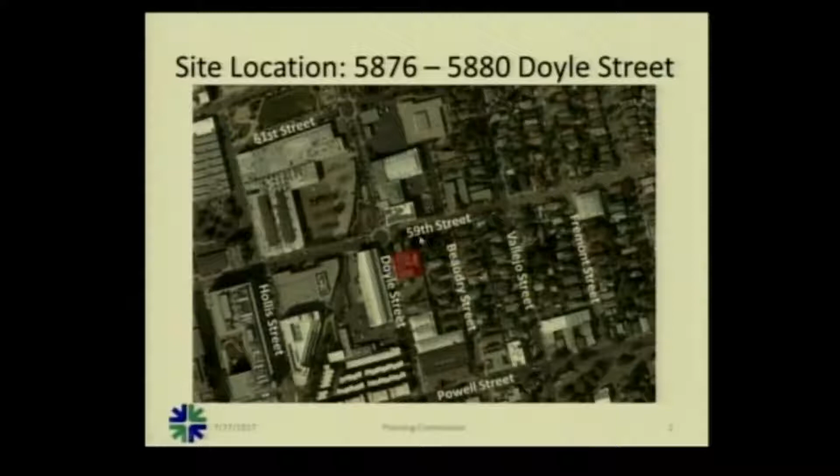Good evening, commissioners. So I'll be presenting tonight on Doyle Street MEWS over on Doyle Street. Here's the location we're talking about. 59th Street is to the north, Powell Street's to the south.

Project overview: this is to demolish 4 existing legal units and 2 illegal units. Because it includes the demolition of residential units, this requires city council approval. The proposal is to replace it with 6 new units, all of which have 3 bedrooms.

For background, this originally came to Planning Commission for a study session back in April of 2016. At that time, there were questions about the feasibility of obtaining 50 bonus points, which are needed for this project, through the use of zero net energy on the site. There were also concerns raised about existing trees to the north and east sides of the property, and in general, unit and project design feedback was provided.

It came back again to the Planning Commission in August of 2016, and at this point the applicant revised their proposal in response to concerns about net zero not being feasible. So the proposal at that time was for 50 bonus points for family-friendly unit design, as well as 50 bonus points supporting citywide small business funds. The Planning Commission supported that proposal, and there were concerns still about potential impacts to the redwood tree, which is on the north side across the property line, and also additional unit and project design feedback.

This also went to City Council for a study session in November 2016. They were generally supportive of the project. The issues they raised as concerns were design and materials at that time, preservation of the redwood tree again, and the council deferred back to Planning Commission for advice and direction on those issues.

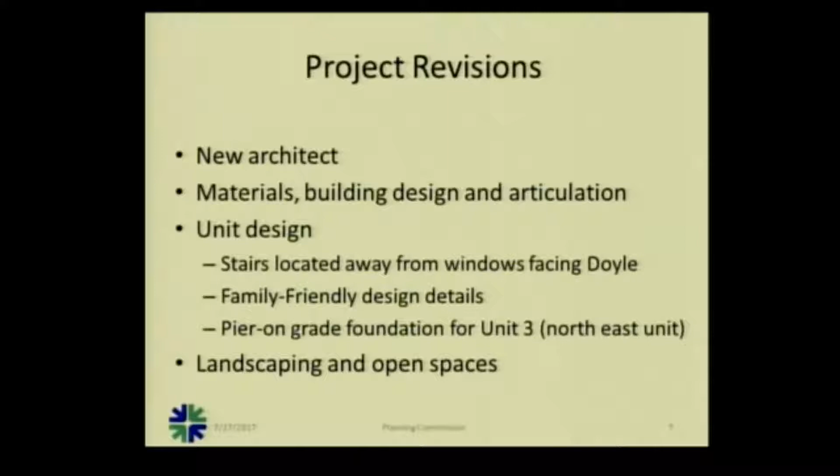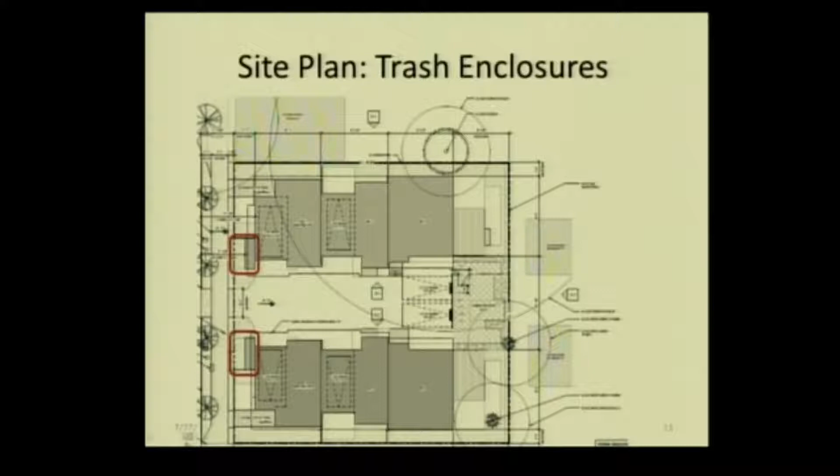Something that came up before was the design of trash enclosures, and those are located at the very front of the property. The applicant has been working with Marcy Greenhunt and Public Works to make sure that they're adequately sized and located so that they can be picked up properly from waste management. Here's the plan that they submitted. Marcy's reviewed this plan and feels that it meets all regulations and requirements for that.

So what we have here, it's a little bit hard to see on the screen. This is the anticipated location that the garbage truck would pull up, and this is the path of travel to get to the 3 types of waste streams on either side, which are enclosures in front of the buildings.

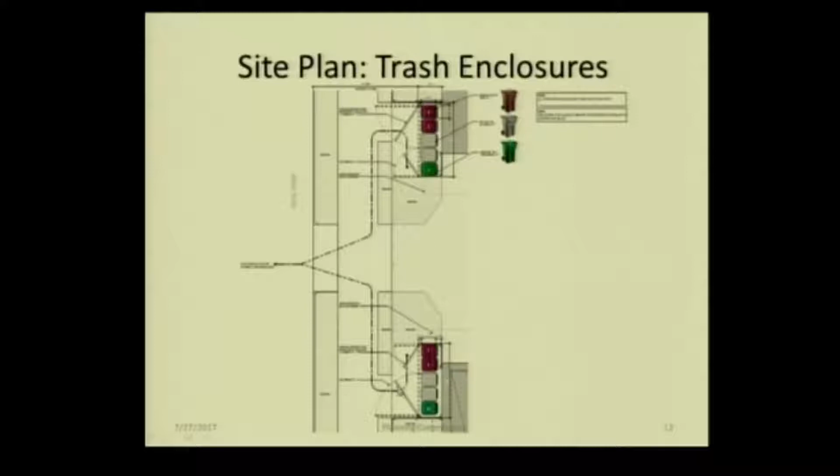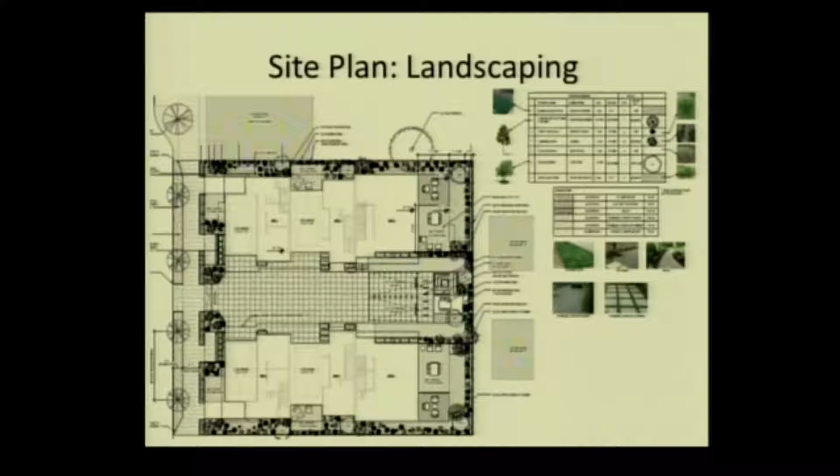So site plan for landscaping is here. There's a lot more details than before. We do have a water efficient landscaping ordinance here, so this plan appears to comply with that. Some more details will be provided in the future to make sure that all the measurements for that pencil out.

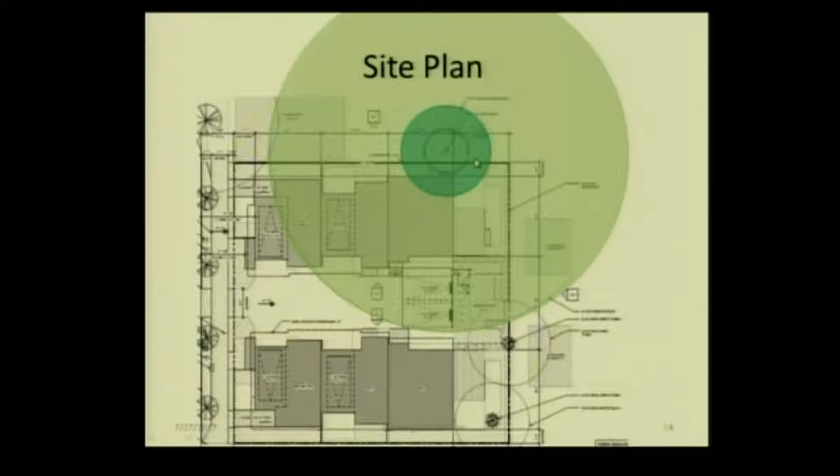And here is the tree on the north side of the property. This thicker line here is the property line, and then there's this jagged line representing the redwood tree. The dark green is the redwood tree's primary root plate, so if you cut into the roots in that area, it can compromise the structural stability of the tree itself. The larger, lighter green circle represents where there could actually be tree roots to that full extent of that area.

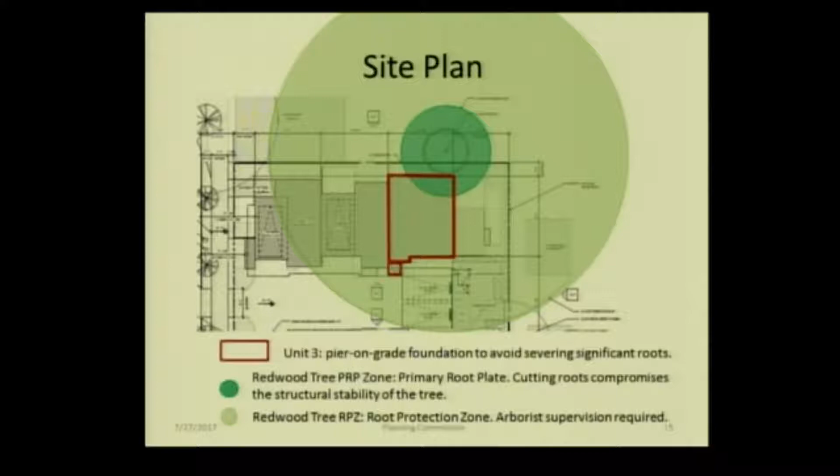Most of that area is paved over right now, so it's not known for sure exactly where the roots are, but there was an arborist report included in your materials that discussed this, and the arborist came to the last Planning Commission study session as well to discuss the details. As you can see, the northeastern unit's outline overlaps with that redwood tree zone, so that now has a pier-on-grade foundation, raised up and not level with the ground, giving more flexibility in where you can actually put the supports to avoid the tree roots.

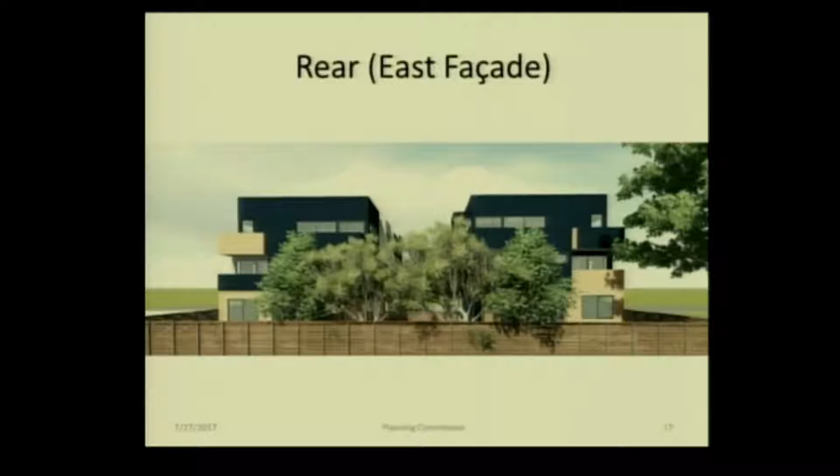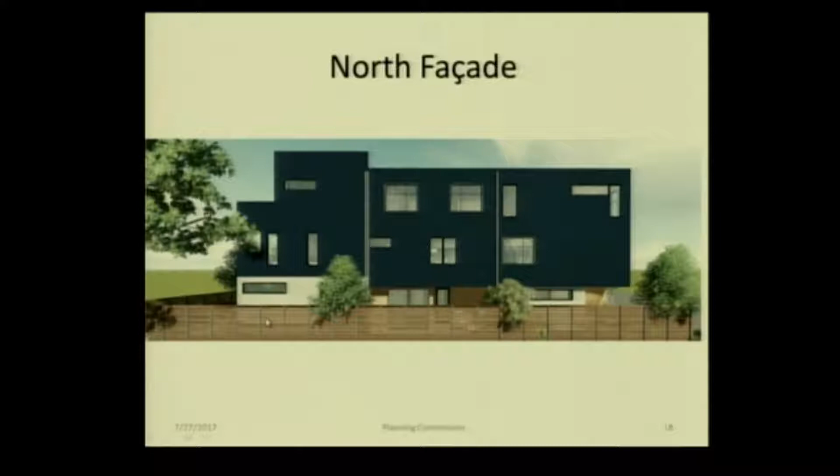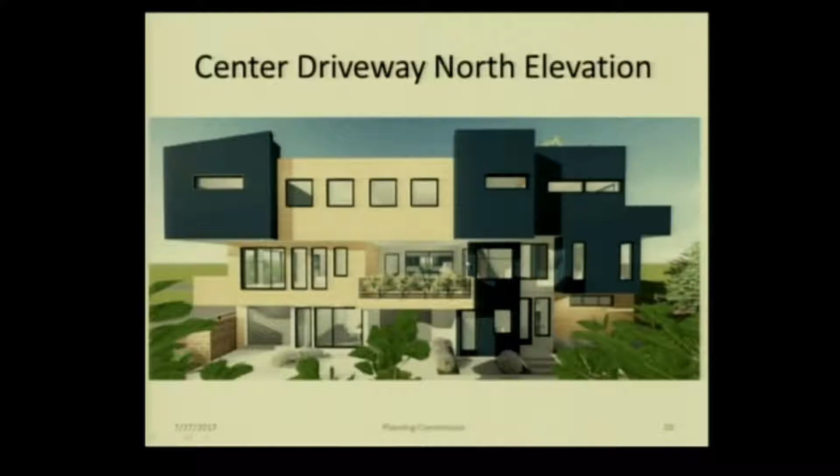And then here, there's a driveway in the middle, if you haven't noticed that already. This would be the north building. If you're in the south building looking across, this is what you would see. And then flip from that, if you're facing south, if you were in the north building looking across the driveway.

And here we are facing north again. So where my cursor is, that's where the trash enclosures are, and the entryways here to the unit, the front unit.

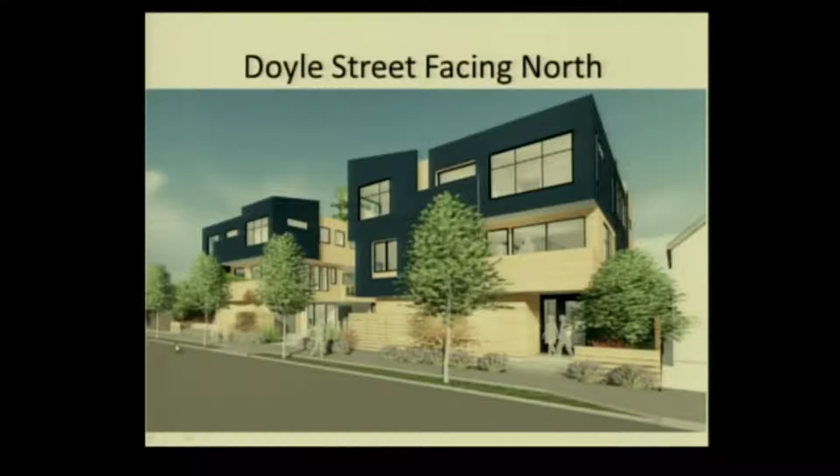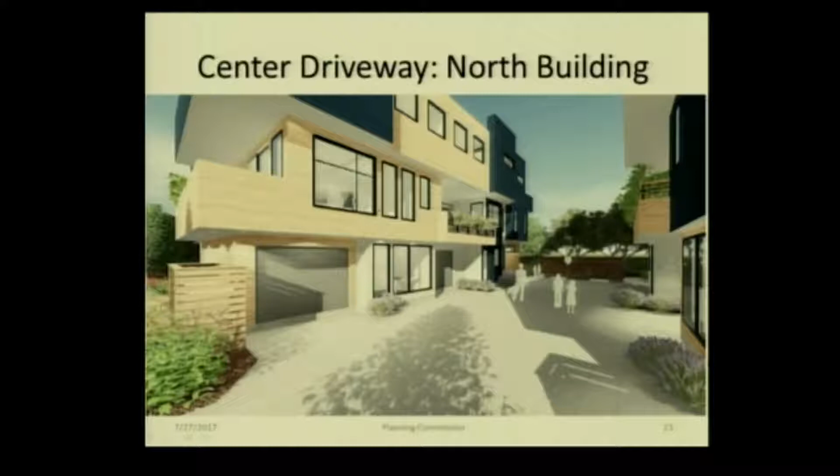If you were to walk into the property now, going into that center driveway, you're looking back at the rear of the property here. This is the northern building, and the southern building is on the right side of this image. This would be unit 1, so this is the frontmost unit.

You're in the driveway right now, but looking at unit 1. And this would be looking out in the background here, would be Doyle Street, and this is unit... 4, my apologies, I got that backwards, so that's mislabeled.

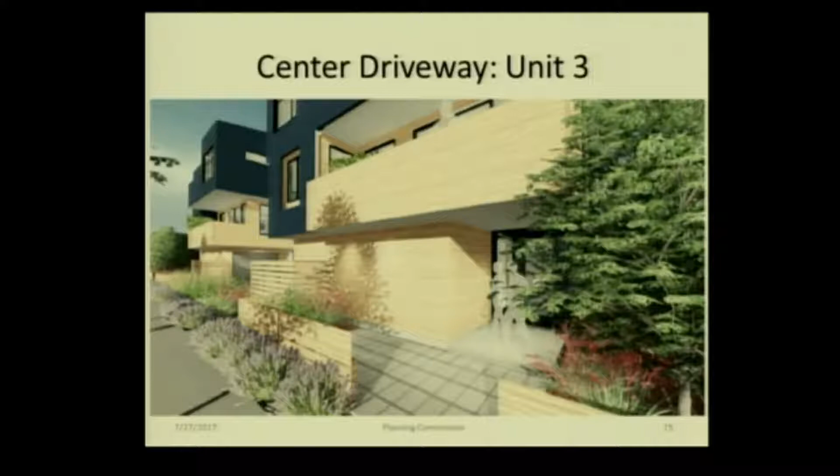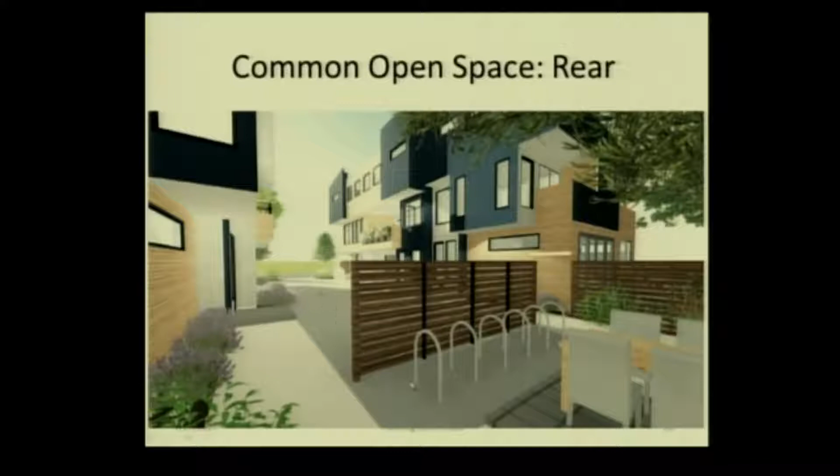And here's the common space that's proposed in the rear. So where this green is, that would actually be looking across Doyle Street there. There's the common driveway, and in the back there's common open space. And this would be the north building here.

So the unit design of the first floor has been revised, as I mentioned earlier. There's parking for the first 2 units, and then back here, unit 3 - this is the pier on grade, so there's actually a few steps up into that building.

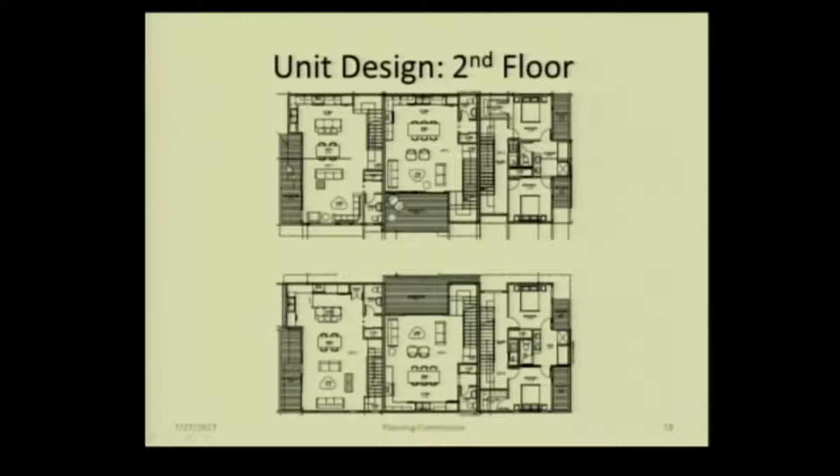The stairwell has been relocated. Instead of being directly at the front of these units along Doyle Street, you now enter towards the back of the unit. When you go upstairs to the second floor, there's open space for each unit on this floor in the form of a deck, and the stairwells are not between the windows in the front and the living spaces.

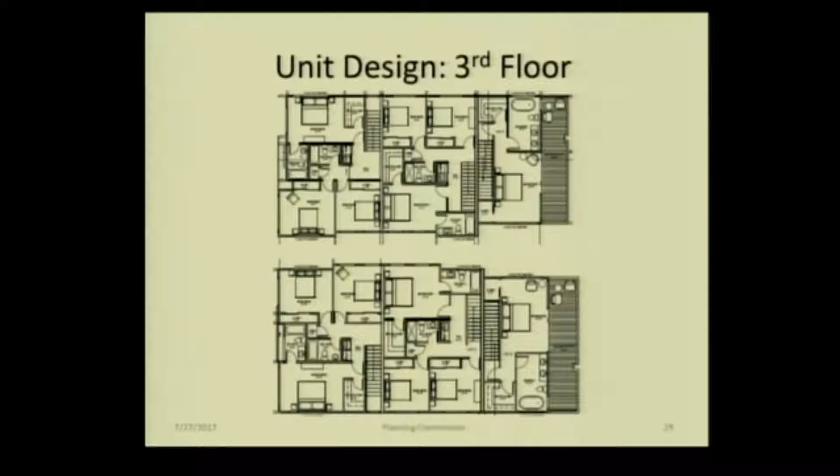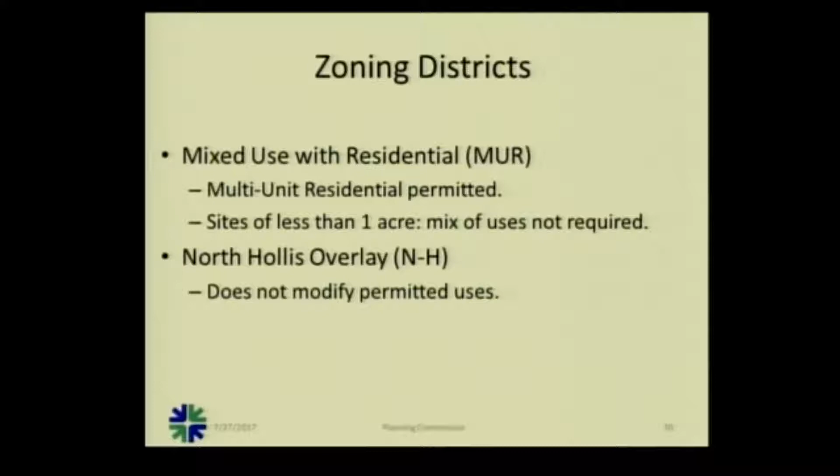So for zoning, this is in the mixed-use residential zone. Because it's a site of less than 1 acre, a mix of uses is not required. It's also in the North Hollis overlay, so this doesn't modify any permitted uses in any way.

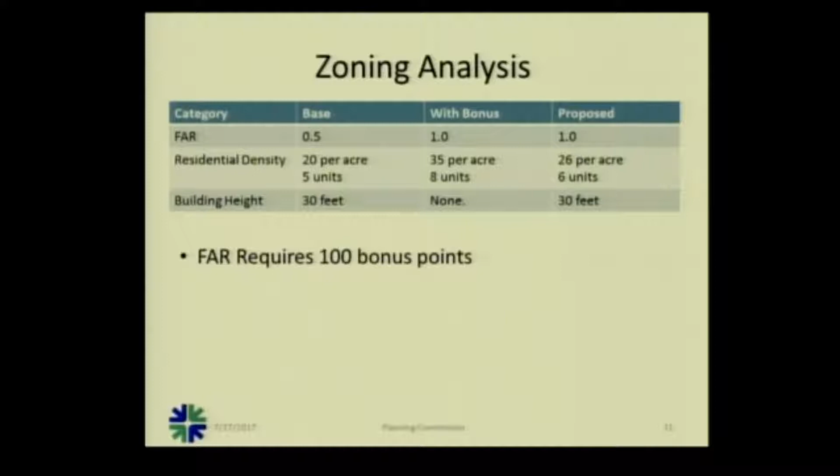For zoning, they're proposed to go over the base for floor area ratio as well as residential density. So this requires the full 100 bonus points. There's no bonus for height - they're at 30 feet, which is the maximum in this area.

For parking, their permitted parking range is 5 to 8 spaces. They're proposing 6, 1 for each unit. And for bicycle parking, they're required to have a minimum of 7 spaces. They're showing areas designated within each unit.

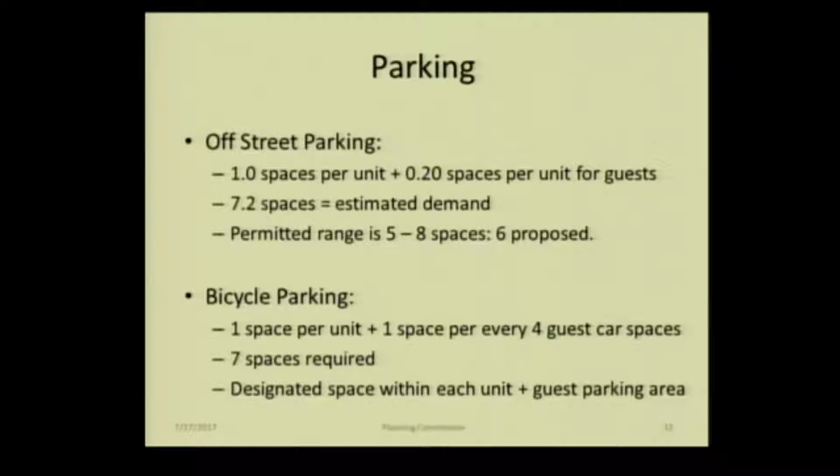For bike parking, we just need some more details to verify the feasibility of it, but it's looking good. They also have the shared guest parking at the back of the property, so they will be exceeding the bicycle parking requirement. For setbacks in the MUR zone, there's no side or front setbacks required.

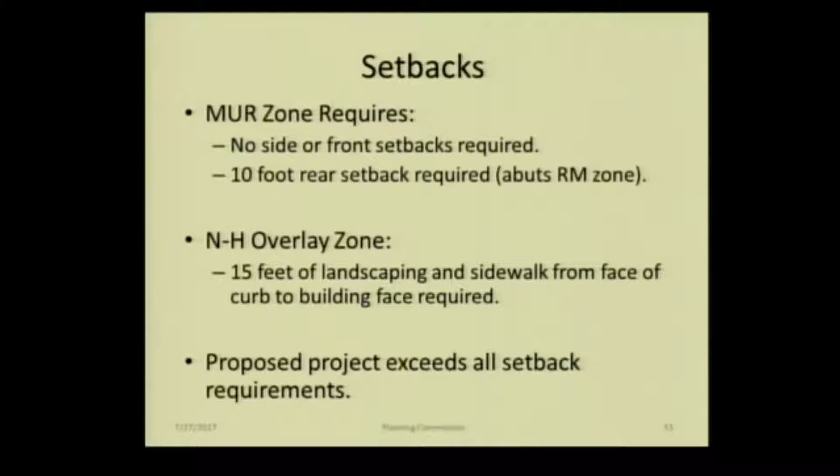There's a 10-foot rear setback required because it abuts the RM zone. They exceed that by about an additional 10 feet. And the North Hollis overlay requires 15 feet of landscaping and sidewalk from the face of the curb to the building face, and I believe it's about 19 feet, so that's exceeded as well.

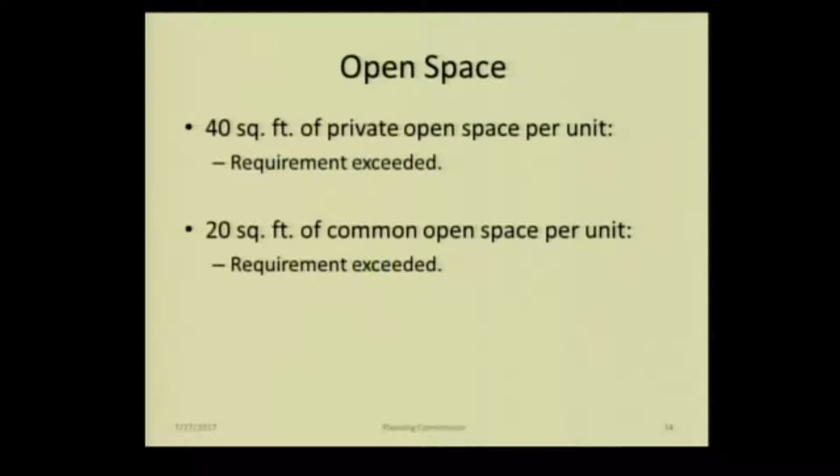For open space, this application is well over that - 40 square feet of private open space per unit. There's multiple decks and private open spaces on the ground floor as well for each unit. And the common open space is well over a cumulative 120 square feet.

For landscaping, there's a minimum requirement of 10% of site area, which would be approximately 1,000 square feet. The applicant proposes over 2,000 square feet of landscaping.

For street trees and utility wires, there's currently no street trees, so staff is recommending a requirement for street trees at every 25-foot interval, with 3.5 feet of planting strip to accommodate root growth, and also to underground all the utilities at this site. This would help provide some continuity across the street, as there's very well-established street trees, so it would help match that.

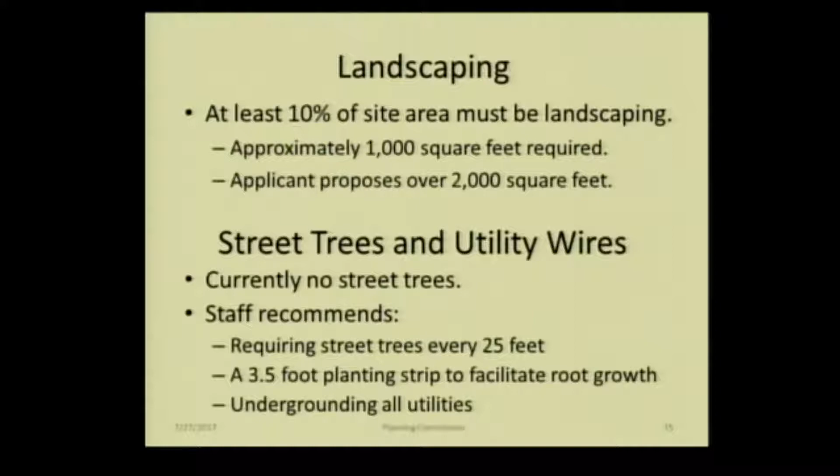For the community benefit options, I mentioned this earlier, the applicant is now moving forward with additional family-friendly units, which would be 100% in this case, and contributing to the small business fund.

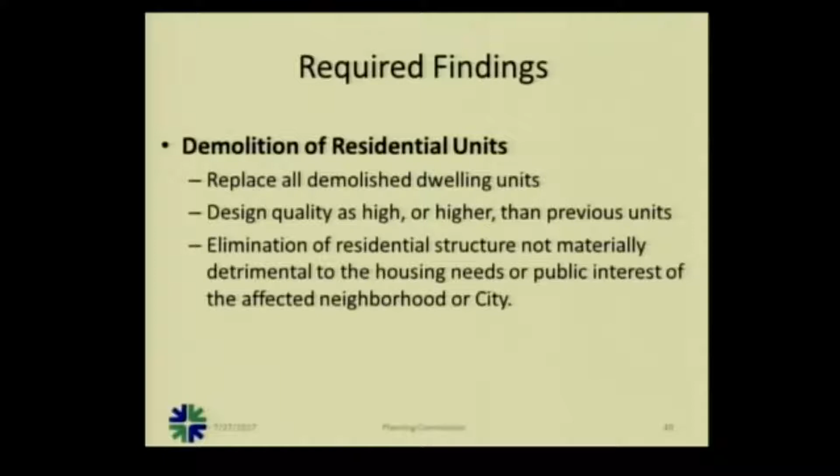And then the applicant proposes all units be family-friendly, earning the maximum 50 bonus points, and also to have all units be 3 bedrooms. So required findings for this project, there are findings for development bonuses in the MEWS zone. For demolition of residential units, there's required findings to replace all of those units. And there's also required findings for design review.

This went to DCC, their Development Coordinating Committee meeting in July, and staff comments at that time were, as we mentioned, new curb, gutter, sidewalk, street trees, underground utilities. Following up with the arborist just to make sure, it mentions in the arborist report that branches would need to be trimmed to accommodate the 30-foot height of the proposed building, but it doesn't say if that would impact the tree or not, so just to clarify that with the arborist.

The redesign of the units to be more family-friendly and relocating the stairwells is very much appreciated, but the trade-off for that was reducing the visual interest on the ground floor. So staff was hoping that they could provide some revisions to that. Staff also suggested possibly considering adding EV charging stations, and that more details are needed for things such as where the mailboxes will be, addressing these sorts of day-to-day practicalities that need to be addressed.

So issues for you to consider tonight are the design. Does the commission have any feedback regarding the design of the overall project, landscaping, or unit design? There are significant changes from the previous proposal. Findings, does the commission feel that they would be able to make the required findings for design review, a conditional use permit, and bonus points to approve this project? And in general, does the commission feel the applicant has adequately addressed the concerns expressed and responded to the feedback provided at previous planning commission and city council study sessions?

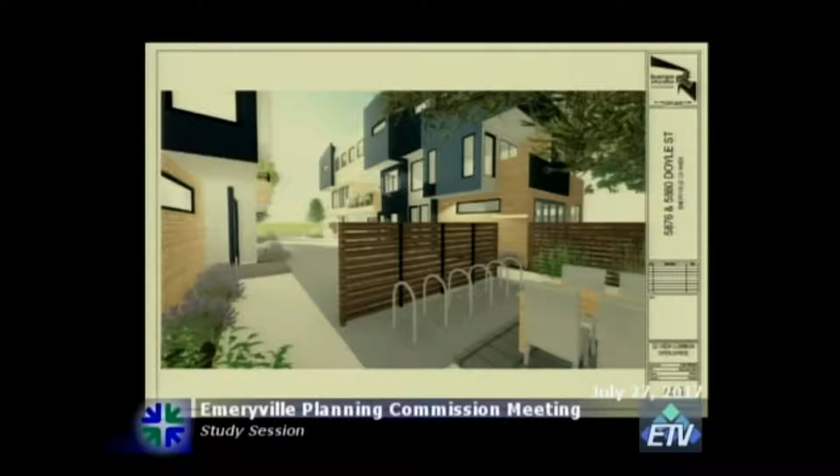I think Navar did a great job of talking about the project, so I'm not sure how much detail I need to go into. I'll try to be brief, and if you have questions I'll let you ask them. In general, we had some concerns come up about the sustainability, the general plan, and green nature of the project, and I think that as with many projects in Emeryville, it is green by its nature. Emeryville is a very walkable city.

This is a very walkable, bikeable site. We did a lot of smaller things, like bicycle parking, pervious pavers, drought-resistant landscaping, and things of that nature. But just by its siting, site location, and density, it has a certain amount of sustainable features built into it. As far as the design goes...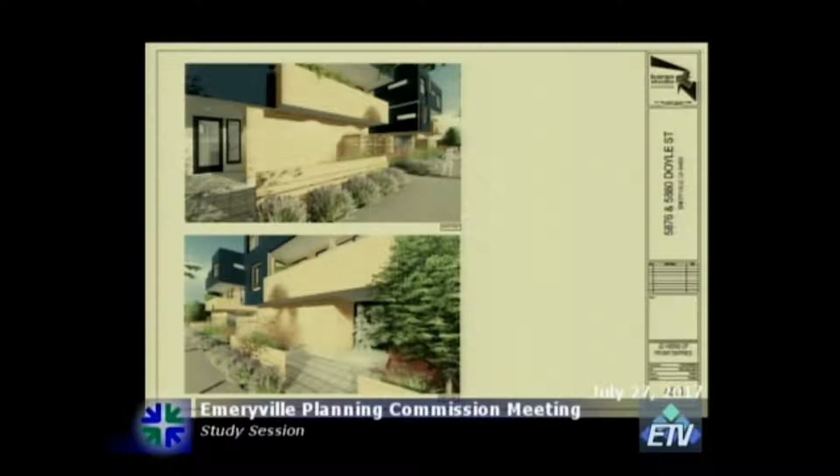I don't really want to compare it to the previous design, but it's a unique situation in that we're working from what was there and trying to address comments made on that project, but in many ways you have a new project. So what we tried to do was get away from the kind of mass and bulk present in the previous iteration, and this architectural laziness, for lack of a better term, of just saying let's mirror this because we have the street down the middle.

What we were trying to do was break this up into a little more of a neighborhood scale, and through the use of form and material moves, bring this down to a scale more in keeping with what's around it, but also not have it look like one singular massive development, but a development related to itself in context. So certain aspects were mirrored because it made sense, with a street down the middle and entries falling to the outside and cars coming down through the middle.

But other aspects we tried to vary, like the decks, so that they would be oriented to the sun. We also tried to step down a little toward the neighboring properties, which was a challenge because fitting 3 floors in 30 feet isn't much, so we were hitting that limit pretty consistently. But there are some parapets we brought in to give that stepped-down impression.

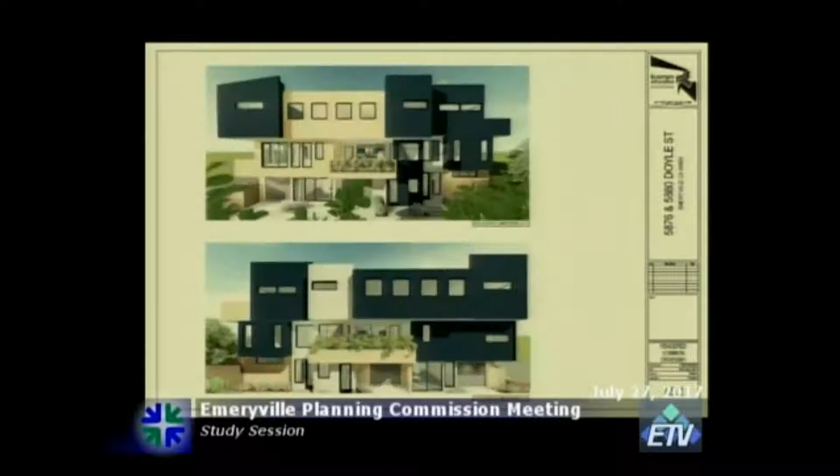The other thing is that we did adjust some of the plans as was discussed.

We did adjust the unit arrangements so that the entire project got smaller. We discovered some miscalculations in FAR, so the project did shrink a bit from the last time you've seen it. We moved circulation around and tried to get more light and air into the units. As part of shrinking the overall size of the project, the deck spaces increased, so there are larger decks off the living spaces and more deck to the rear of the project.

I think some of the other things we did that should be pointed out was we did speak with the neighbors, albeit very recently, and so we agreed to shorten some of the parapets. We discussed the brick building that's adjacent, so we promised that we would not build a fence against that brick wall, and we would shore it up as needed to make sure there was no damage done to it. We also discussed the type of fence and that there would be a new fence to the rear property. As was discussed, the building now steps down to the rear of the property to address the smaller scale of the homes at the back there.

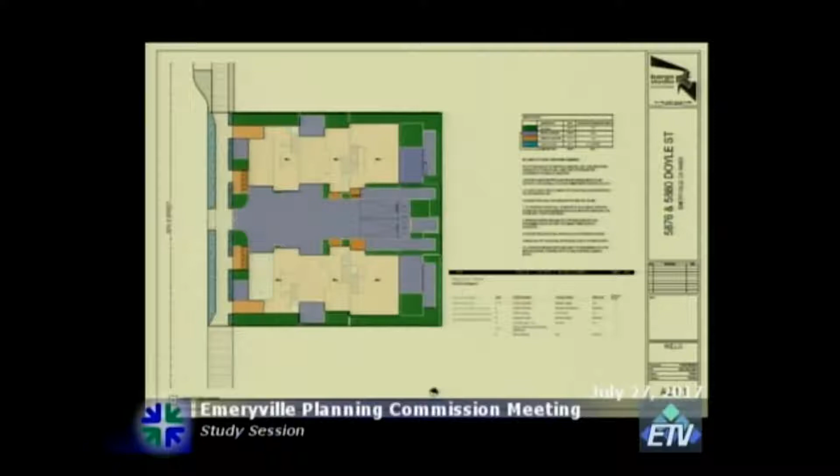I think that's about it, so I'll open it up if you have questions. Anyone have any questions of the applicant? No? Okay, nobody? I do. Okay, so Matt, I've got a couple questions for you.

Unit 1 and Unit 4, they're adaptable units, right? Yes. So does that mean all the door swing clearances have to conform to wheelchair criteria? Yes. So do you see some variances with what those clearances might require in those units on the ground floor? I would have to run through and make sure they were all correct, I mean it's a minor point, but it would affect your floor plans. Fair enough, I understand, and that can be something we look at.

I think there's still a few details we'd like to tune up, including the amount of space for bike parking, and we can look at that as well. Right out in front of Unit 4, Unit 1, you've got this private open space - is it pavers or concrete, what is that? I think at the moment we're calling it pavers. So you're putting it there on the west side, probably get some pretty nice light. That's the hope. And then you have a fence, how high is that, like 4 feet? Less, actually, 3 feet. Okay, great.

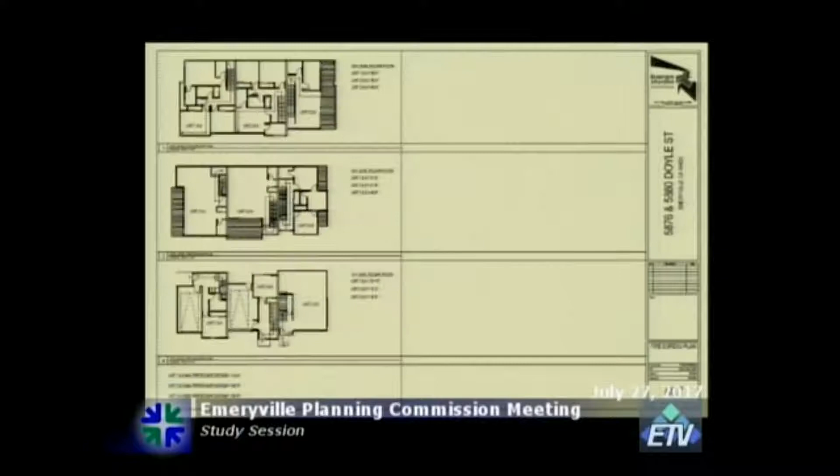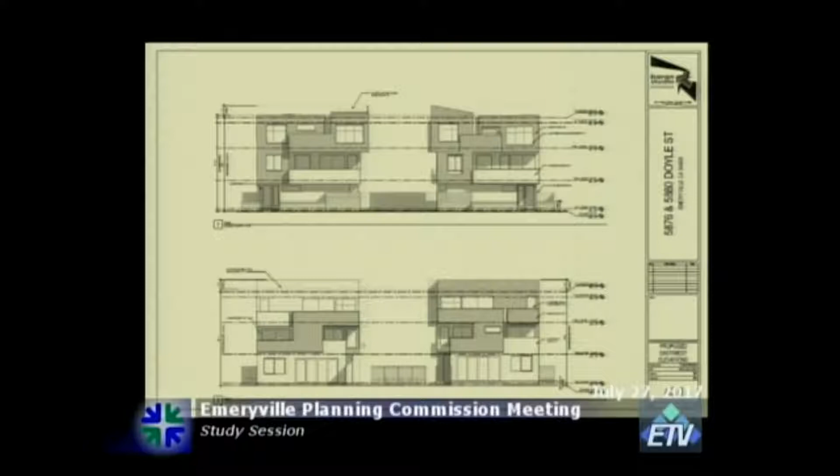The elevations, I've got some questions for you on that. Sheet A3.0. So if you look at the top elevation on the west, that's facing the street, you've got a slope on the southern building for the one unit up there, and then you've got a parapet on the northern building that I'm assuming is also sloped. Is that correct? Yeah, you can see it better in that rendering, I think.

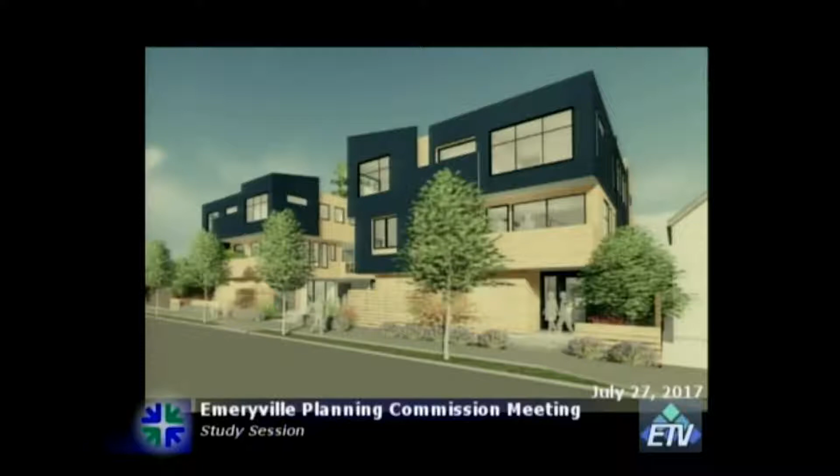So are you having those as parapet walls in order to maintain some kind of minimum or maximum roof height as opposed to having sloped roofs, or was that just a choice? The original drawings were sloped roofs, and that was the hope. But the thought was originally to do a master bedroom that was taller, then step down to a lower ceiling on the other bedrooms. Given the constraints, particularly the rear units - the corner rear unit, Unit 3 I believe, has a different floor to ceiling height because we're cutting out 18 inches due to the roots of the trees. So there are some challenges to get what we'd consider standard floor to ceiling heights in there. We're at 30 feet, and there was no way to really go up at all from there. But it seemed like there was an opportunity to do so because you're at the center of the site and it's not impacting those neighbors. It now functions as something we were thinking might be a screen for any PV that came in at a later date.

So those two master bedroom masses have adjacent to them horizontal panels in the same plane that kind of look like they're balconies, but they're not really, are they? They're not. I was trying to add depth to that elevation, and there were some questions about drainage and things of that nature. So we're treating it like a second skin, like a rain screen, where water would pass behind it and you wouldn't have to worry about sealing it in and draining it. But it also becomes kind of an overhang to the deck and provides some shade.

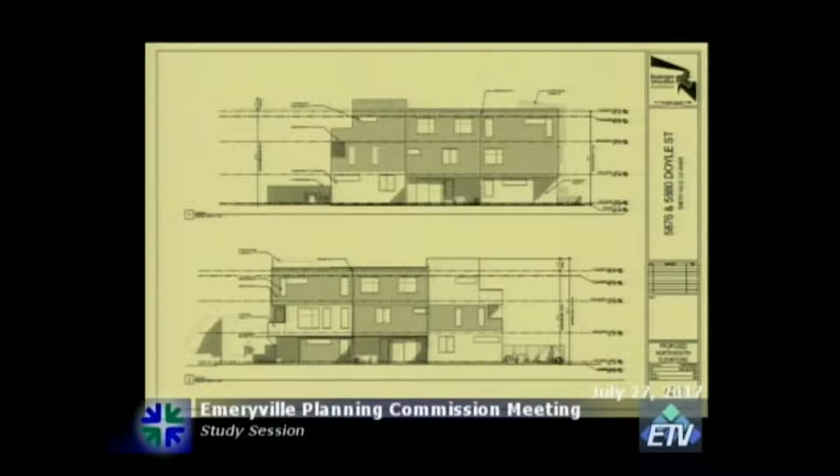So your drawings show a nice kind of horizontal, almost like ribbing, but that wouldn't really be the case. It would be more like horizontal strands of wood. I think I don't know if it's reading some way in the rendering that isn't quite true, but the idea was that it would be similar to the profile we've been using in the past. So when these interlock, they give you a very clean, square reveal as opposed to a lap.

Oh, I see. And so the planning staff has made comments about how this ground floor is a little bereft of activity. Do you have any ideas about that? Do you want to address it, or do you think nothing addresses it?

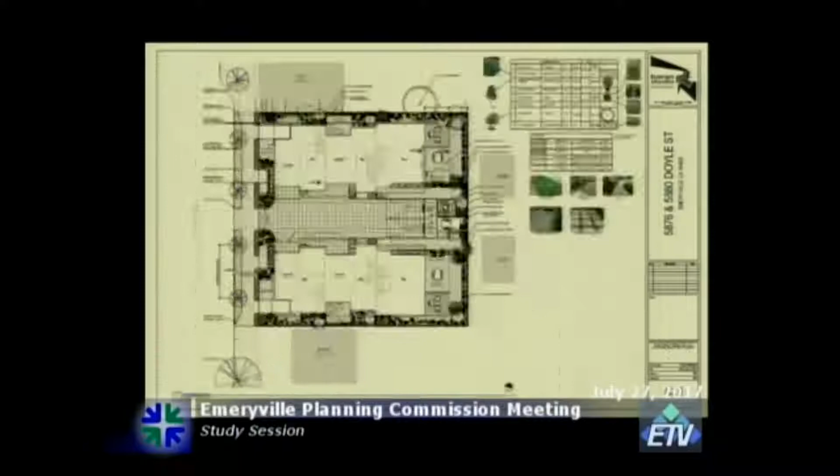The only thing we were looking at was this last image, where a lot of this is taken up by... these are a little, they're not the beautiful renderings that Maya did on the earlier work, but we were trying to put something together for the meeting. We added a window that is essentially going into the garage. A big portion of this is the trash and recycling. And the rest will be landscaped, and the hope would be that people will actually use those porches.

So that horizontal window is an addition? Yes. Great, thank you very much.

Any other questions of the applicant? Yeah, just, I actually thank you for answering the question about what the most recent ground floor was, because I was thinking it was that, and I'm seeing a lot of things, so that was one of my questions.

The other thing is you mentioned light and air a bit. I didn't really see it articulated in the drawings. Can you elaborate on what you're thinking? One of the comments we had heard in previous study sessions was an appreciation for the larger windows. I think we, as much as possible, tried to bring in large windows and get as much light and operable area as we could to bring in air.

But what you see here is essentially the result of maybe three things. One, the function of the window—some places you have a kitchen, or maybe there's a privacy issue, or a bathroom and a shower. So if it isn't a full height window, it's typically because of a functional requirement. And then there was some discussion about family friendly requirements as well that these were responding to. So it's more programmatic requirements that we were trying to follow.

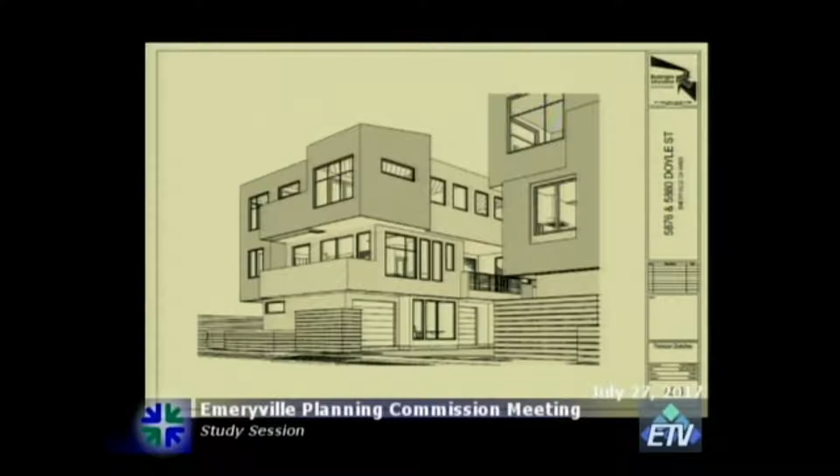I don't know if that answers it. I think so, I just wanted you to elaborate since it was mentioned. The other thing I think about is that this floor plan—and I'm not here to talk about what the project isn't, I'm here to talk about what it is—but when we originally inherited this, the stairs were at the front, and it's germane because we're a continuation of that. The windows were being obstructed by the stair. So we flipped the unit, at least in terms of the stair, so now the windows are on the front and the balconies are on the front, and the stair is pushed to the back of that forward unit. We're hoping it'll bring a little more openness.

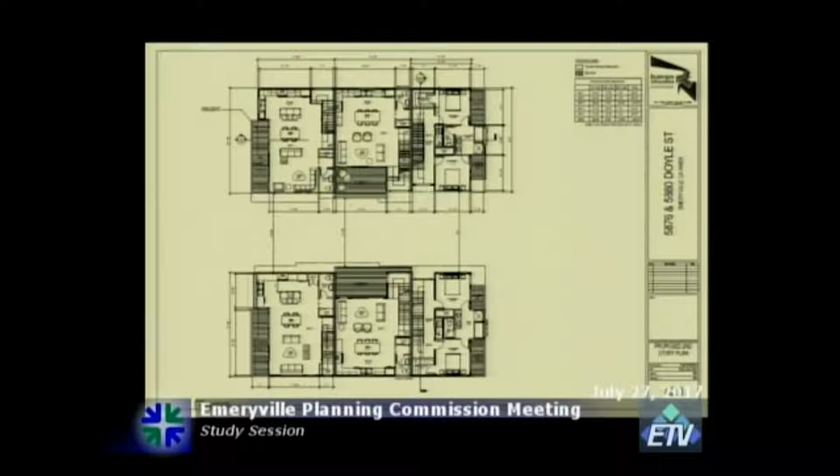Any other questions for the applicant? Nope. Okay, thank you very much.

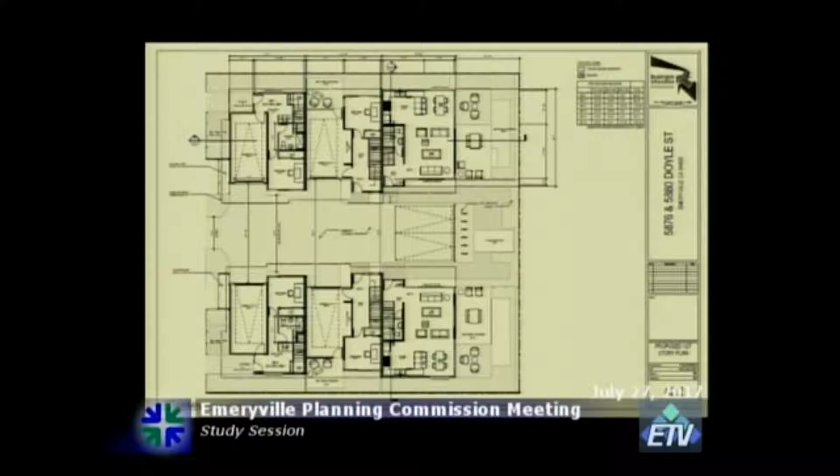Okay, great. So what I was saying, they have shown the inside secure bike parking area. What they haven't provided yet are the dimensions for those areas. So they just need to show that it complies with our code requirements for dimensions. But other than that, it is all there.

The bike parking in the rear does not meet our dimensional requirements, so that's just going to have to be revised, but there's still room for it. And that's designed to be temporary guest parking, and that's partly why it's screened as well.

Okay. That answered some questions too. Thanks.

And then, I think all of the other elements are looking good, and you've addressed things like the underground utilities, like the streetscaping. So I did want to just say that the massing and the articulation and the materials are quite attractive, and I appreciate the effort that's gone into that.

I'll keep it brief. I think it's great. I think by the time this third study came around, we really nipped and tucked everywhere we could. I'll just say it's everything about it, really, the color scheme, the makeup of it, the subtle incongruency of the two halves. I think it's very sophisticated. So great job.

Let's see, I think I missed one of these study sessions, but probably that's why it's so good right now. But the last edition of this, I remember, was the prior design effort by a different architect, and I think this is really infinitely better.

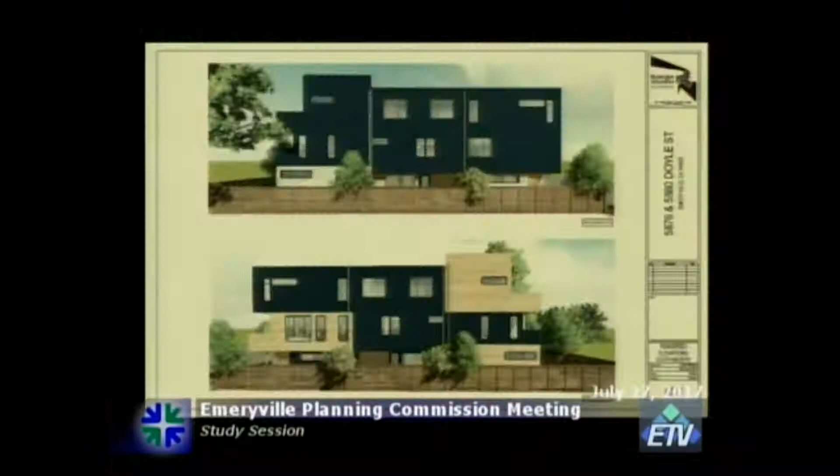And because there's only 6 units, you're not going to get a lot of cars in and out. So I think this is a true viable play space for kids that is not normally seen, like the first project we saw this evening, that parking lot is a parking lot - I can't see kids playing in that. This I could see kids playing in, I could see adults bringing out a chair, hanging out here while their kids are there. So I think that's just really a good job.